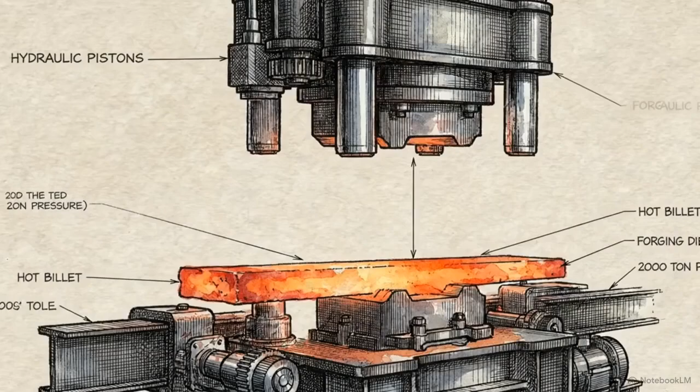Industrial manufacturing requires humans to interact with forces capable of destroying them. Operators work inches away from high voltage, corrosive chemicals, and massive kinetic energy. Safety engineers neutralize these threats using a foundational equation: hazard plus exposure equals an accident.

In heavy industry, the hazard itself, the voltage or the pressure, is often a requirement of the process and cannot be removed. However, if the exposure variable can be forced to drop to zero, the accident is mathematically eliminated.

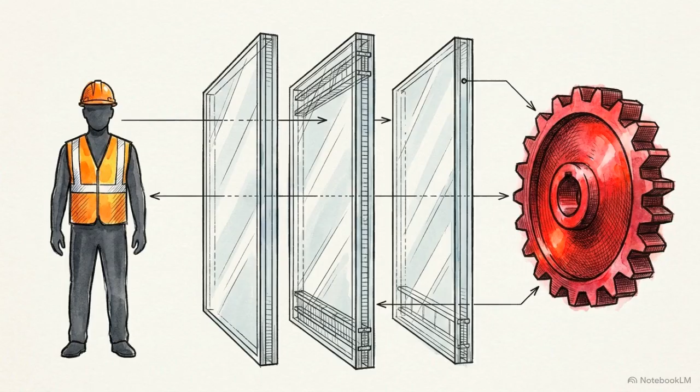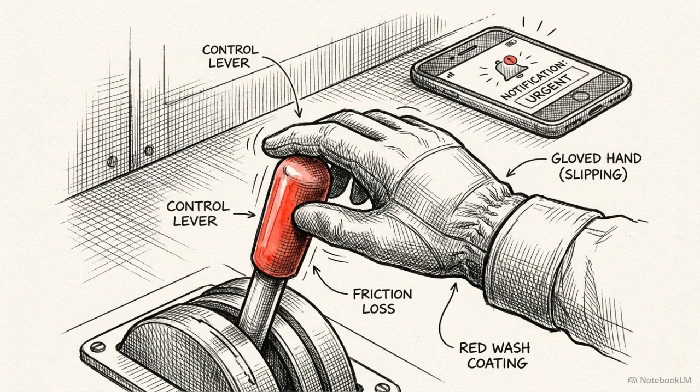This objective is achieved through a layered architectural defense system designed to isolate the worker from the inherent dangers of the machinery. Civilian safety models often focus on managing the worker through rulebooks, training programs, and constant warnings. But human behavior is the most volatile variable in a factory. Factors like fatigue, distraction, and habituation make an operator's memory an unreliable primary defense against injury.

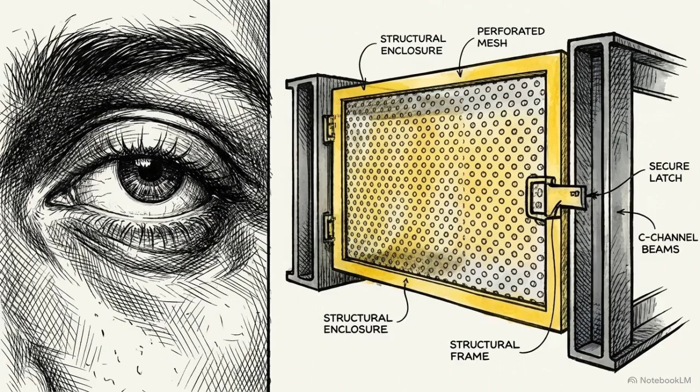To maintain a reliable environment, engineers must first alter the physical machine and the workspace layout. The goal is to neutralize the threat before it ever reaches the human operator. By shifting the burden of safety from the worker's vigilance to the environment's design, engineers remove the opportunity for a simple lapse in judgment to become a fatal error.

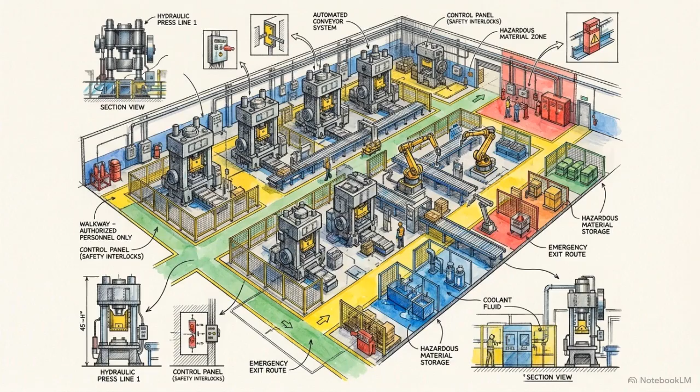This strategy is known as engineering controls. These are physical modifications to the workplace that address a hazard at its source, regardless of how an employee behaves.

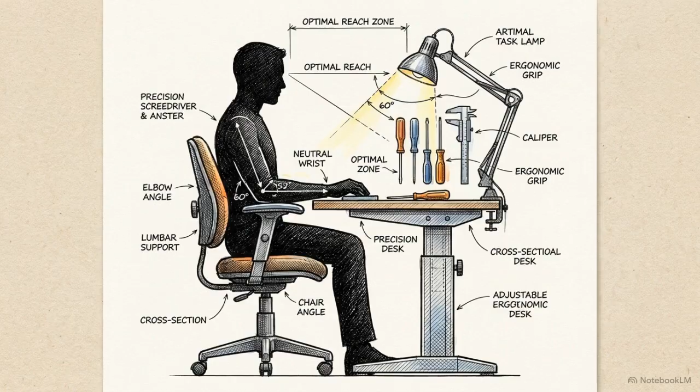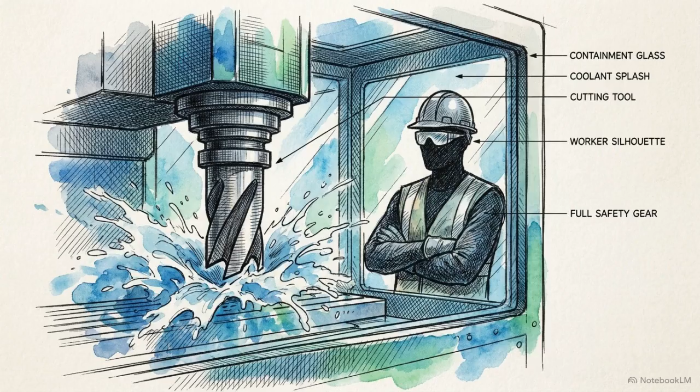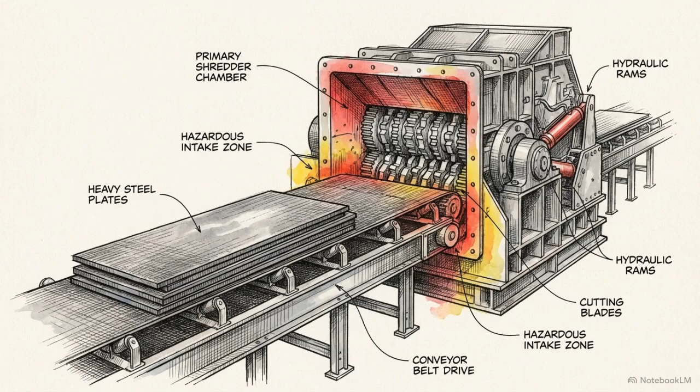When the hazard must remain, engineers use enclosure. This is the complete physical containment of moving parts or toxic liquids during normal operations, sealing the danger away from the operator. If the machine requires material to be fed into it, full enclosure is impossible. In these cases, engineers install barriers to prevent physical access to the hazard zone while the machine is active.

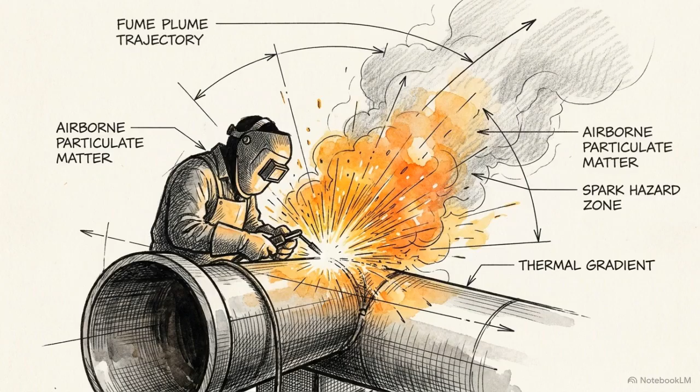For invisible threats like toxic vapors or dust, ventilation is used. This industrial hood is positioned to pull hazardous airborne exposures directly away from the work zone before they can be inhaled. Collectively, these five strategies serve as a physical wall, separating the worker from the most dangerous aspects of their environment.

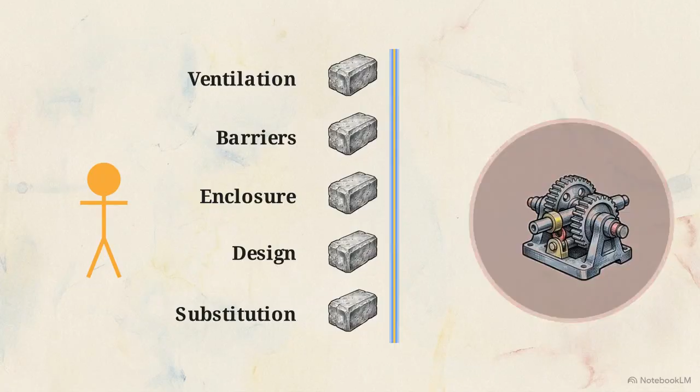Physical engineering controls have practical limits. Some hazards cannot be barricaded or enclosed while still allowing for human maintenance or operation. When physical barriers are insufficient, industry relies on a rigid vocabulary of visual linguistics to govern behavior.

These signs are precise classifications defined by OSHA and ANSI standards, designed to communicate specific levels of severity at a glance. The danger classification is the highest tier, indicating an immediately hazardous situation that will result in death or serious injury if ignored.

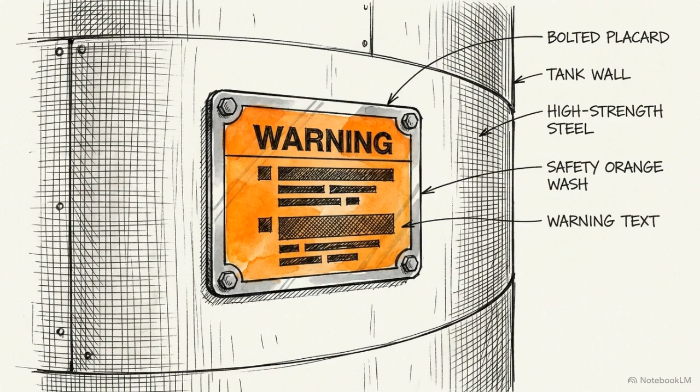Orange warning signs indicate a potentially hazardous situation. While the risk may not be as immediate, the outcome could still be death or serious injury. Yellow caution signs mark potential hazards that may result in minor or moderate injury, serving as a reminder against unsafe work practices. Other indicators provide operational data.

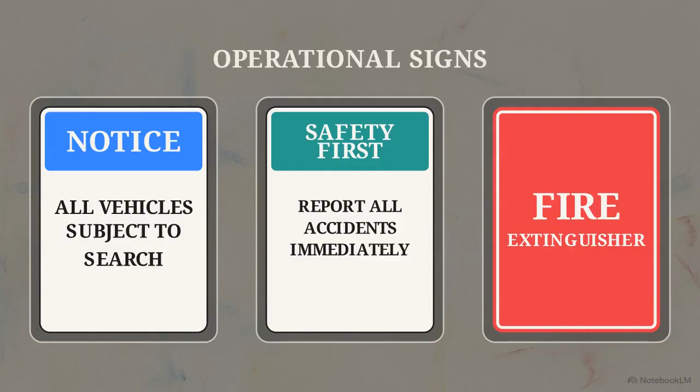Notice signs state company policy, general safety signs outline procedures, and red and white fire safety signs identify equipment locations. This standardization translates risk into visual commands, providing clear direction in moments where human judgment might be compromised by stress or urgency.

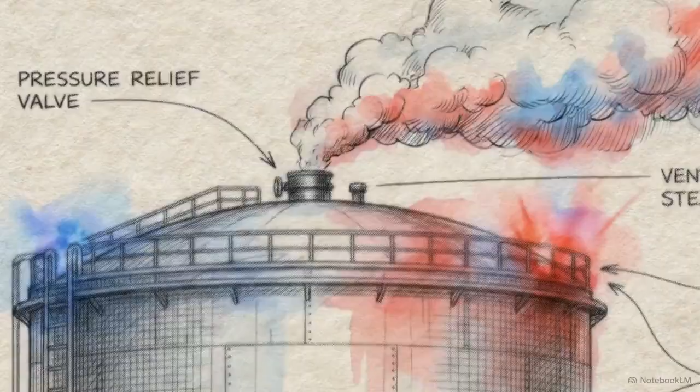In a chemical emergency, first responders must identify hazards before they can safely approach. They only have seconds to understand the chemistry of a leak. Responders use the NFPA diamond, a specialized visual tool built specifically for rapid hazard identification in high-stakes environments.

The system uses a numeric scale from 0 to 4. In this matrix, higher values always indicate a more severe threat. The blue field represents health hazards, and the red field represents flammability. A 0 indicates a stable material that will not burn, while a 4 indicates a deadly substance that ignites below 73 degrees Fahrenheit.

The yellow quadrant indicates reactivity. This scales from a 0 for stable chemicals up to a 4 for materials capable of detonation under normal conditions. The white field is reserved for special hazards. It uses specific codes to warn responders of corrosives, oxidizers, or radioactive materials that require unique tactical responses.

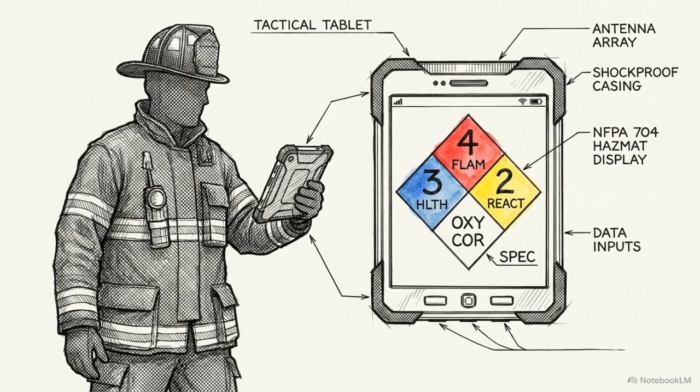The NFPA diamond functions as a multivariable data matrix, allowing responders to make tactical decisions based on the specific chemistry of the scene.

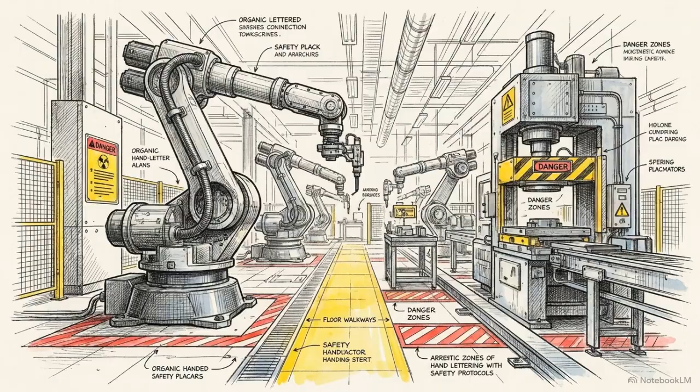These codes and machines form a single cohesive framework for industrial survival. First, engineers modified the physical environment, using barriers and ventilation to remove as much exposure to the hazard as possible. Where physical barriers end, standardized visual linguistics take over.

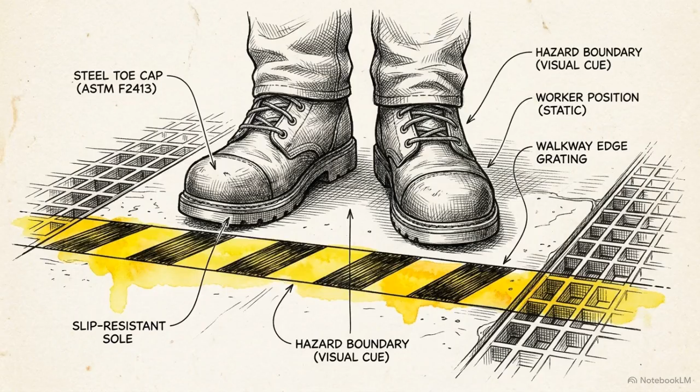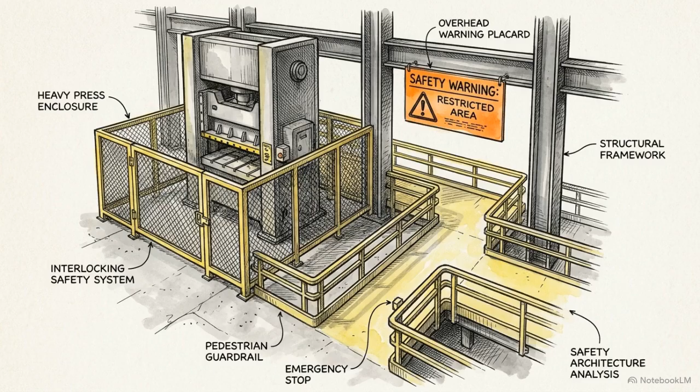ANSI classifications and NFPA data provide the information necessary to regulate human interaction with any remaining threats. By addressing both the physical environment and the operator's perception of risk, this layered system attacks the exposure variable from two sides at once. Industrial safety integrates these engineering and visual controls to manage the risks inherent in manufacturing. This transition from raw hazard to designed safety turns dangerous workspaces into environments with calculated and manageable risks.